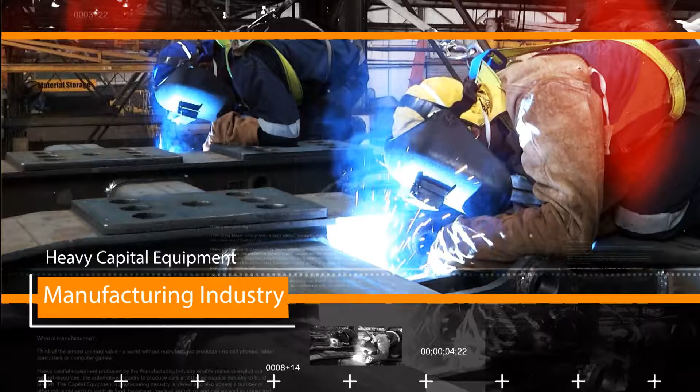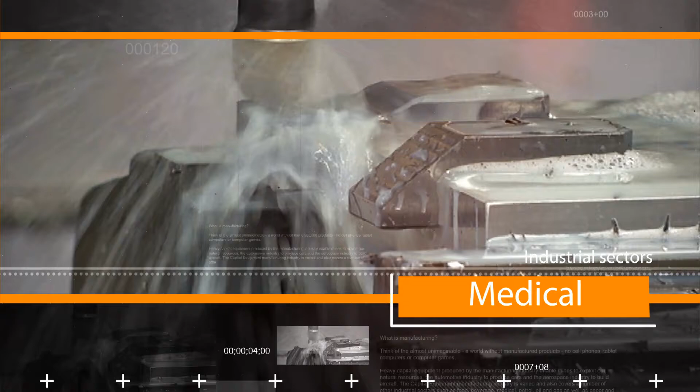What is manufacturing? Think of the almost unimaginable: a world without manufactured products. No cell phones, tablet computers, or computer games. Heavy capital equipment produced by the manufacturing industry enables mines to exploit our natural resources, the automotive industry to produce cars, and the aerospace industry to build aircraft. The capital equipment manufacturing industry is varied and also covers a number of other industrial sectors such as food, beverage, medical, petrol, oil and gas, as well as paper and pulp, just to mention a few.

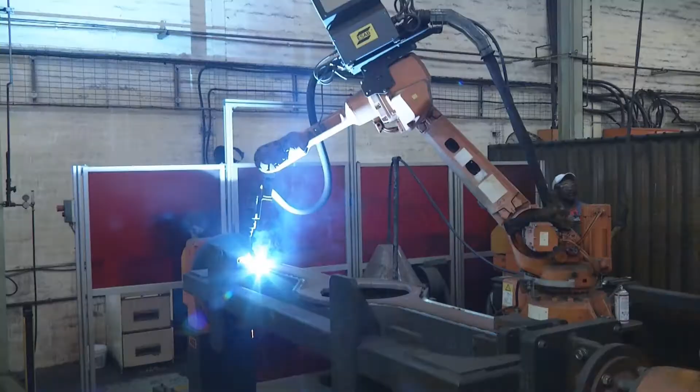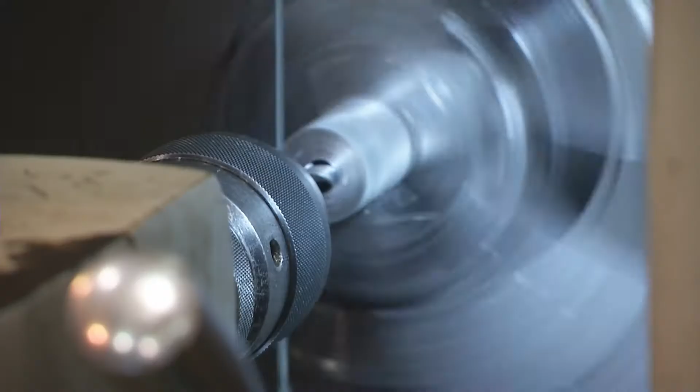The South African Capital Equipment Export Council, or SACEEC, is an institution that aims to grow the South African manufacturing industry and encourage exports, and promote and develop local manufacturing, which will in turn improve job creation and skills development. The Council promotes the manufacturing of capital equipment products in South Africa with locally produced castings, forgings and materials.

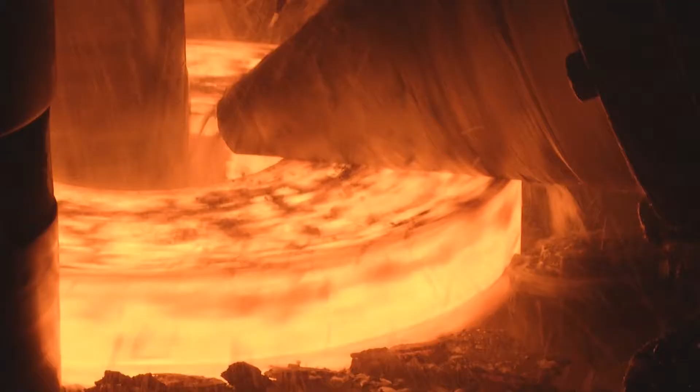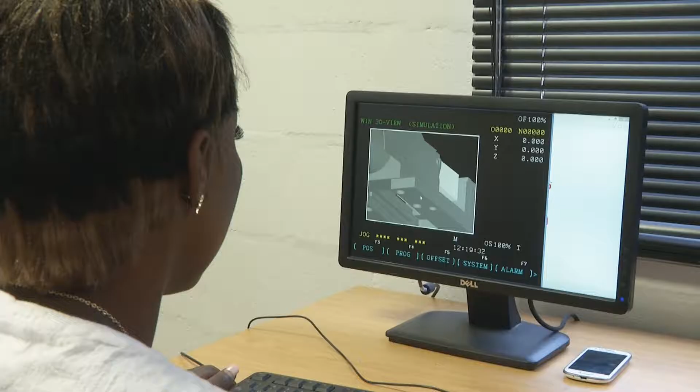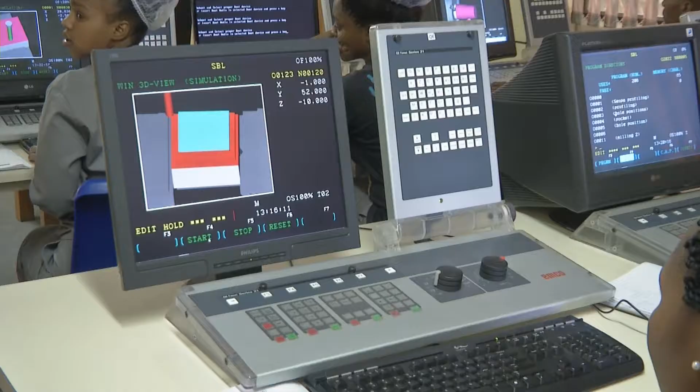The South African Capital Equipment Export Council now brings you the Discover Your Career in the Capital Equipment Manufacturing Industry initiative to highlight interesting careers in the versatile capital equipment manufacturing environment. So why is the Council talking to you? It has been tasked by the Gauteng government to identify the skills that are necessary to sustain and grow the capital equipment manufacturing industry in South Africa and to develop a model for the upgrading of skills development in the sector. Technically trained people in the manufacturing industry are called artisans.

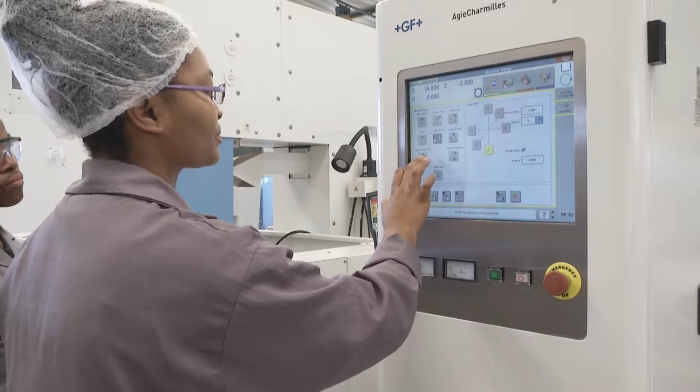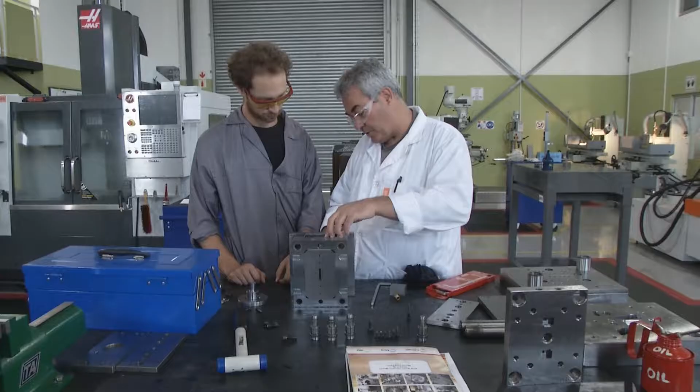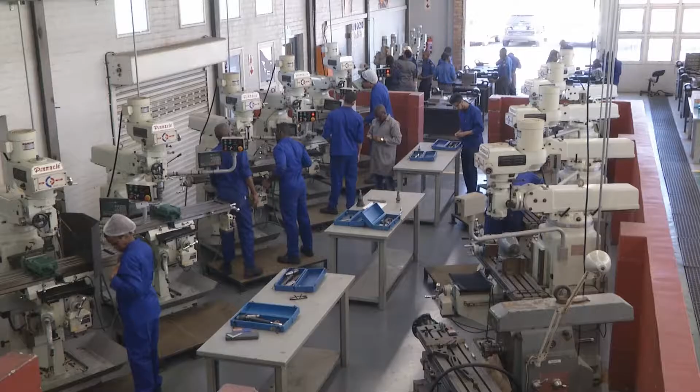They are trained and tested individuals who work with their hands. How do you become an artisan? To qualify as an artisan, a candidate needs to do an apprenticeship that includes theory, practical experience, and on-the-job training. In addition to training offered by community colleges and technical schools, apprentices also enroll at Technical Vocational Education and Training, or TVET, colleges. These colleges offer programs for specific trades or skill sets.

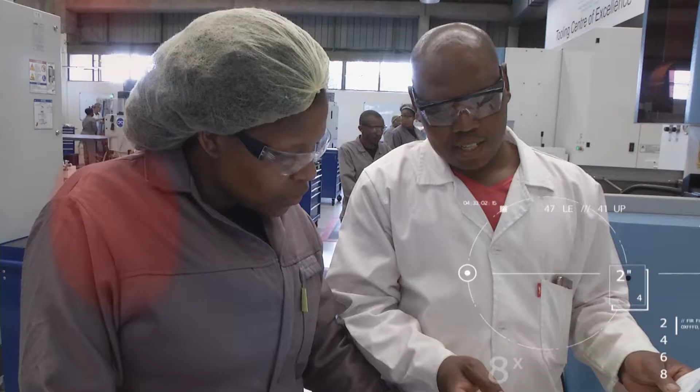Large companies and government offer apprenticeships. Apprentices earn a wage while they train. The time it takes to qualify can vary. To conclude their training, apprentices do a trade test to obtain a national qualifying certificate. To enter the SACEEC apprenticeship program, most member companies require candidates to have grade 12 level maths, English, engineering, graphics and design, and mechanical technology of at least 60%.

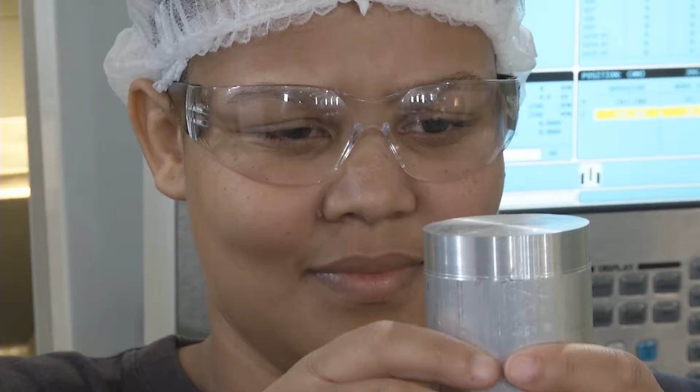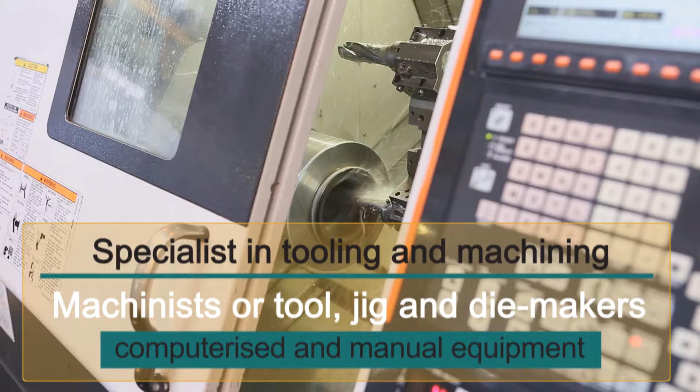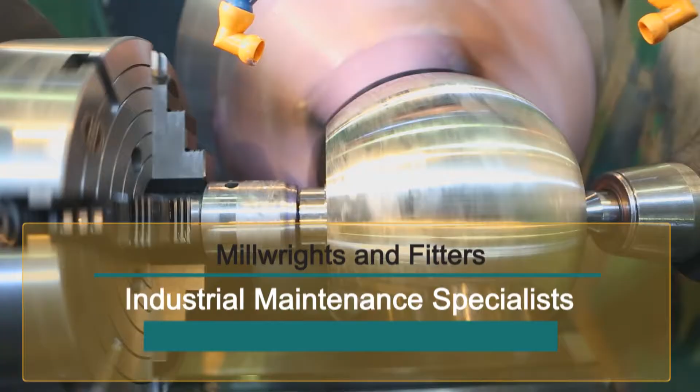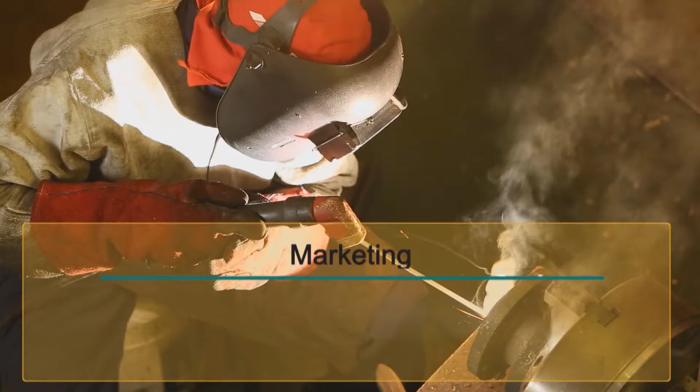Career opportunities are available to skilled people in the capital equipment manufacturing industry in a number of categories. Specialists in tooling and machining are called machinists or tool, jig and die makers, and they work with computerized and manual production equipment. A second category comprises millwrights and fitters who work as industrial maintenance specialists, while artisans in the boilermaker category work in the field of pressure vessel or general fabrication. Artisans in the coded welder category are trained in specialized welding techniques, while the technical sales staff category is responsible for marketing and technical client liaison.

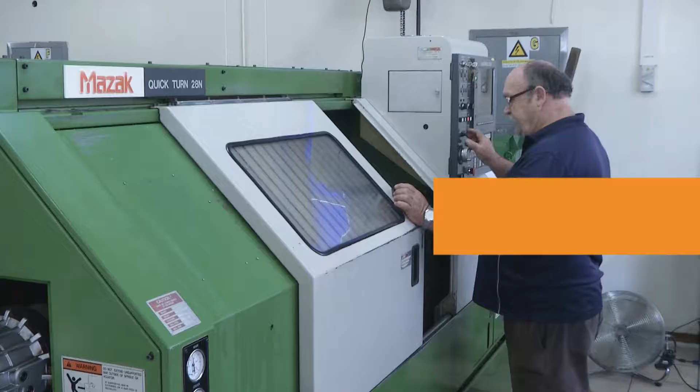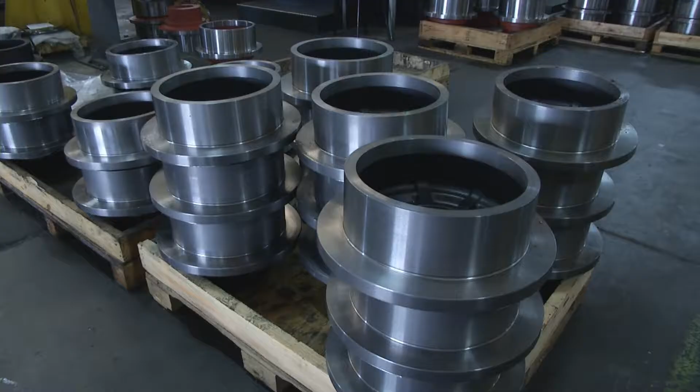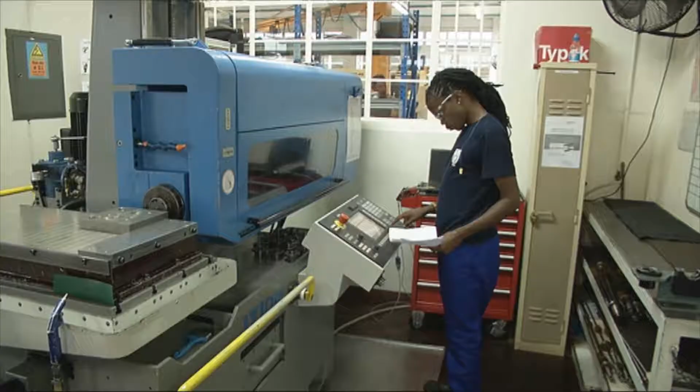Tooling and machining. What is a machinist? Machinists manufacture steel components used in the manufacturing of capital equipment such as heavy equipment for, amongst others, the mining and infrastructure development sectors. Machinists are also employed in the automotive, aerospace and marine industries, as well as a number of other sectors where machinery are manufactured. Machinists operate different types of computerized and manual production machines to manufacture components. They ensure that parts meet required specifications and measurements.

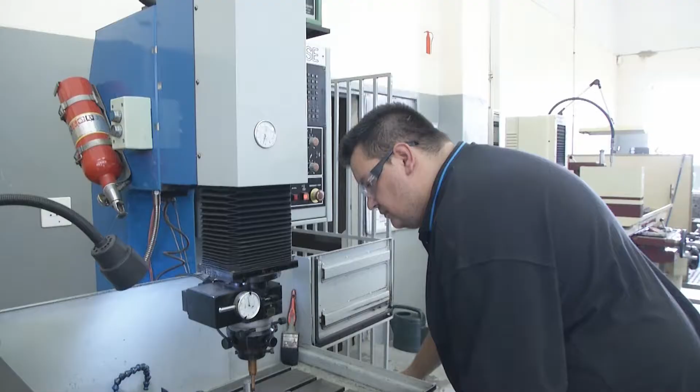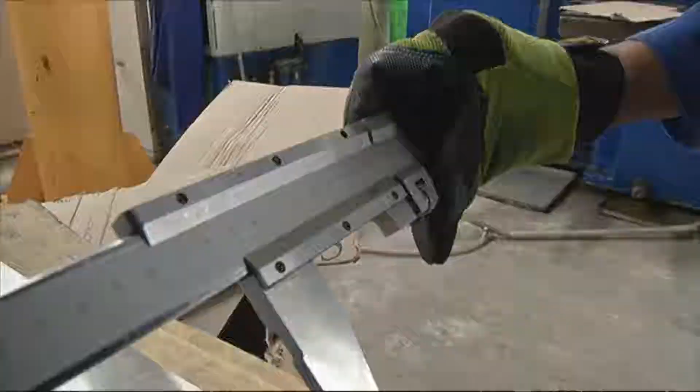If you want the type of job that requires working with your hands, programming computer numerically controlled or CNC equipment, or just the accurate measuring and physical skills for manual machining, then this could be a career for you. Is this career suited for you? Machinists are mathematically minded, good with their hands, detail-oriented, and hard-working.

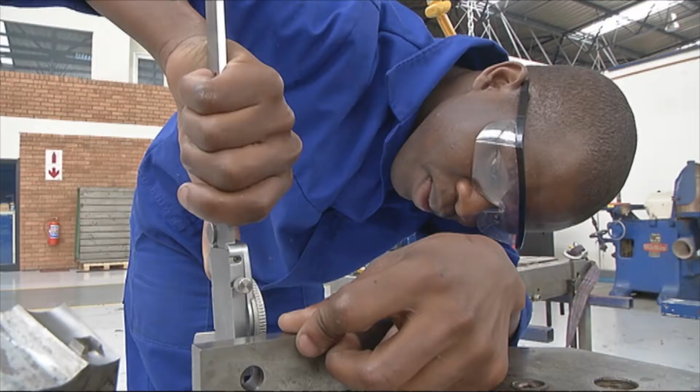Tool, jig, and die maker. What is a tool, jig, and die maker? The job of a tool, jig, and die maker is to create machine tools and dies used in the manufacturing process of virtually all manufacturing products, ranging from vehicle components to plastic bottles.

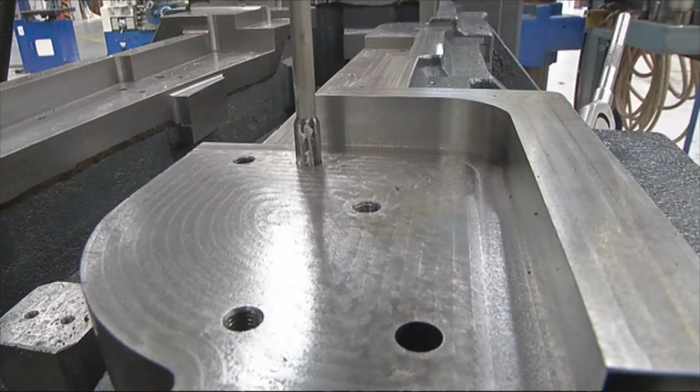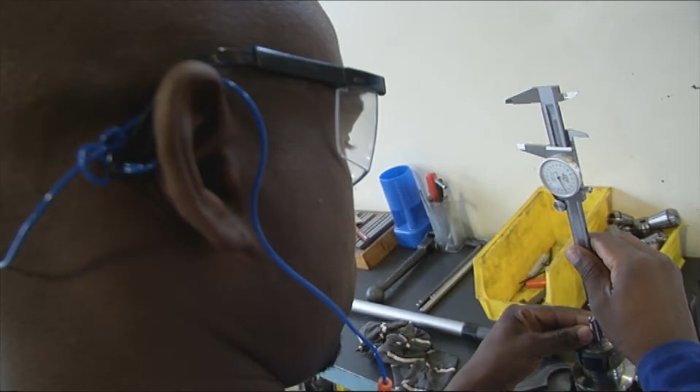They design machine tools and use blueprints to plan how to make machine tools, jigs, and dies. They use gauges and measuring devices to ensure that tools meet required specifications. If you consider yourself a creative and innovative person when working with your hands, then tool, jig, and die making may be the career path for you.

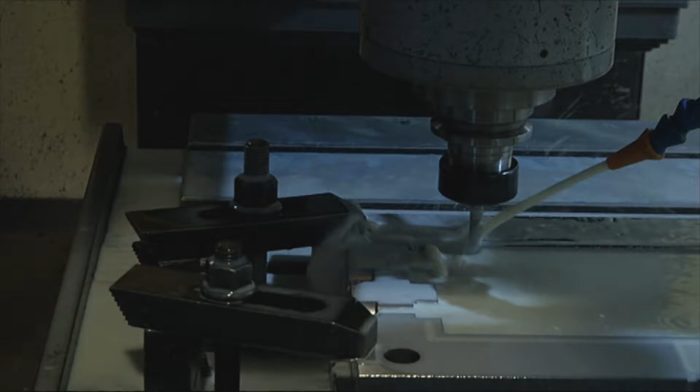Is this career suited for you? Tool, jig, and die makers need to be mathematically minded, detail-orientated, accurate, creative, and innovative with a good ability to do manual work.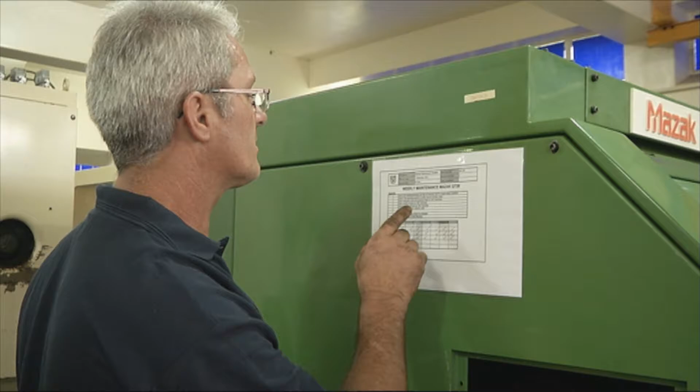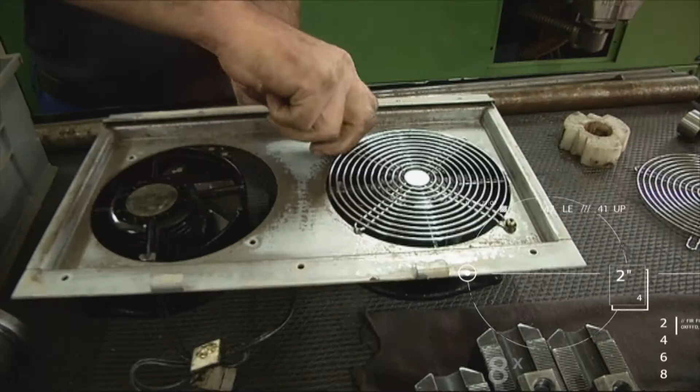Industrial maintenance. What is a millwright? Millwrights are known by a number of names such as electromechanician, ground electromechanician, machine tool millwright, or a printer's mechanic. Millwrights are craftsmen or specialized tradesmen. They install, maintain, and repair stationary industrial machinery and mechanical equipment.

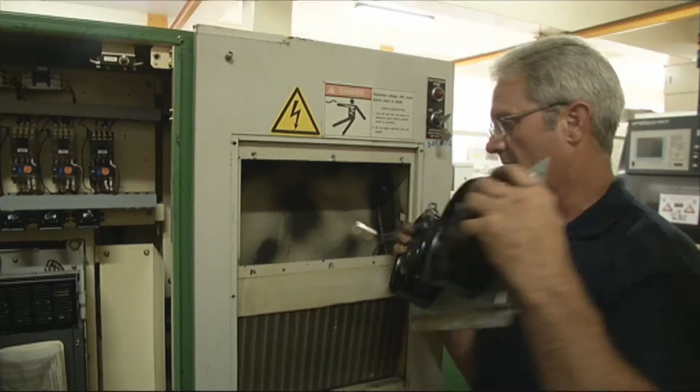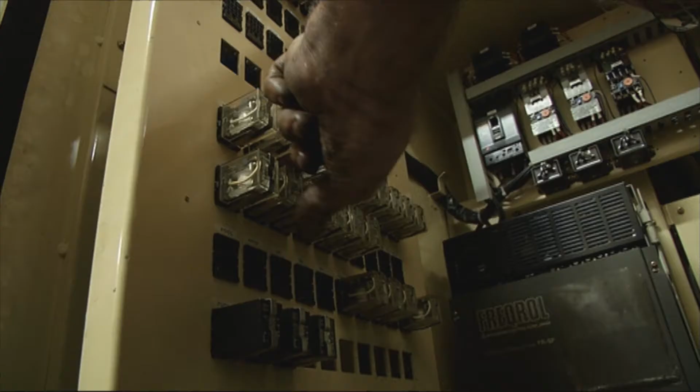Are you suited for this career? Millwrights are mechanically minded, self-confident, able to deal with pressure, accurate with good hand-eye coordination, and strategic.

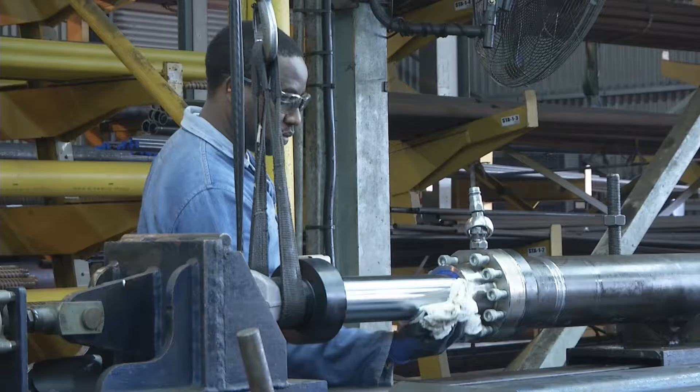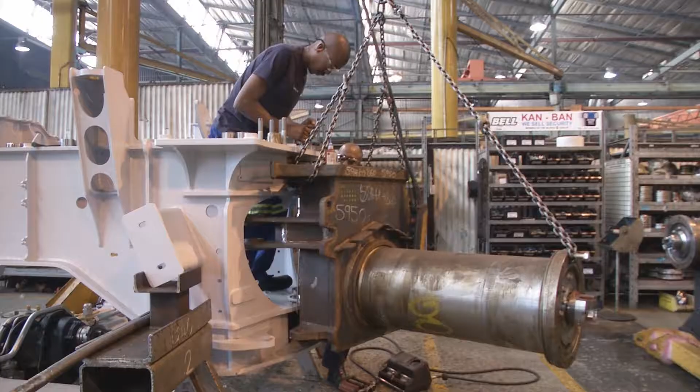Fitter. What is a fitter? Fitters maintain and repair many different kinds of machines. They are highly skilled craftspeople who assemble and fit machine components. They monitor the service cycles of machines and use blueprints to ensure that the correct parts are fitted.

Are you suited for this career? Fitters are mathematically and mechanically minded, good at working with their hands, able to take exact measurements and work accurately.

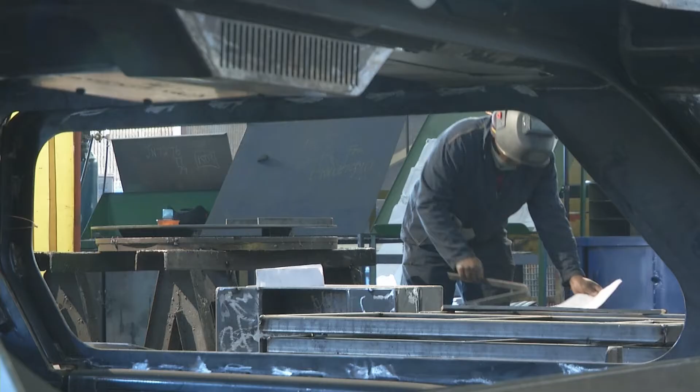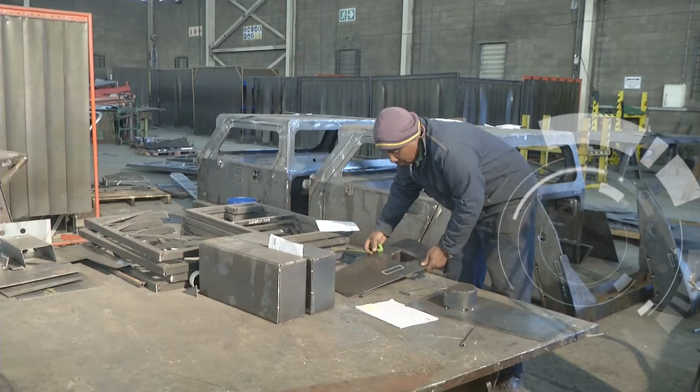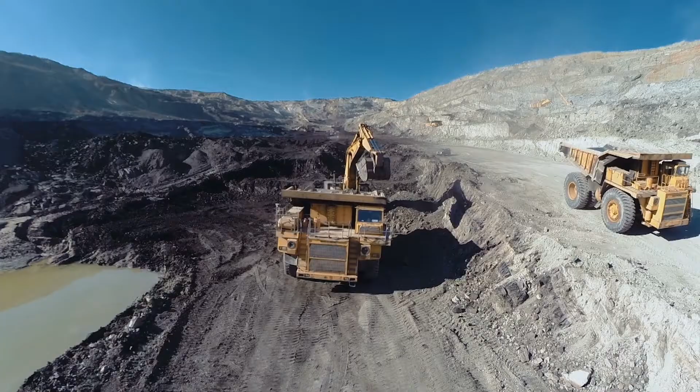Boilermaker. What is a boilermaker? Boilermakers are specialized fabricators. They work in the engineering manufacturing industry and make capital equipment, boilers, engines, and high-pressure vessels. They can be employed in factories, power stations, including nuclear power stations, on oil rigs, fuel refineries, chemical plants, mines, in the shipbuilding industry, and in engineering metal fabrication.

Boilermakers are highly skilled, accurate, and have an ability to understand geometry and technical drawings. Is this a career suited for you? Boilermakers are team workers, good with their hands, detail-orientated, organized, competent with technical drawings.

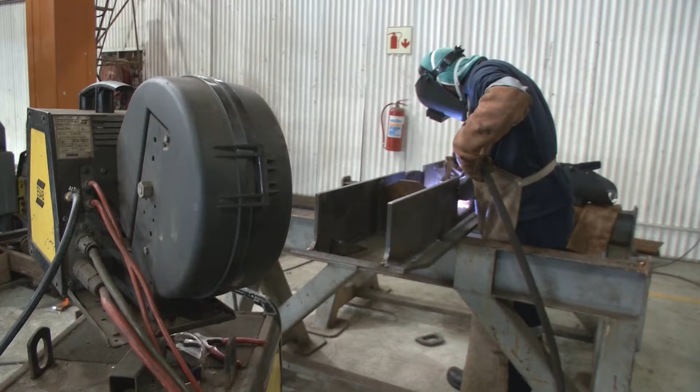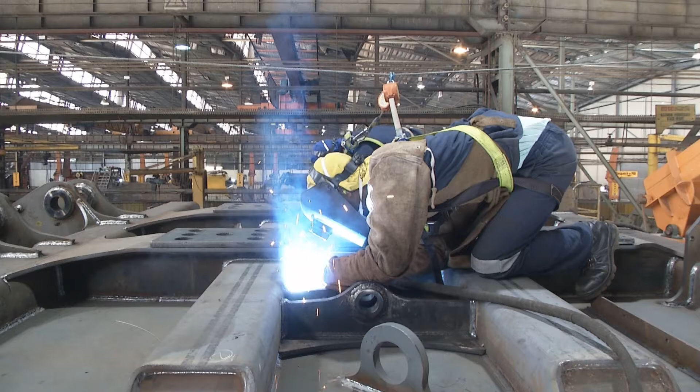Coded welder. What is a coded welder? Welders work with metal and know its strengths and weaknesses. Welding is the process of joining pieces of metal together. Heat is applied to metal pieces and this causes the metals to bond together. Welding is used in shipbuilding, automotive manufacturing and repair, aerospace applications, and thousands of other manufacturing activities.

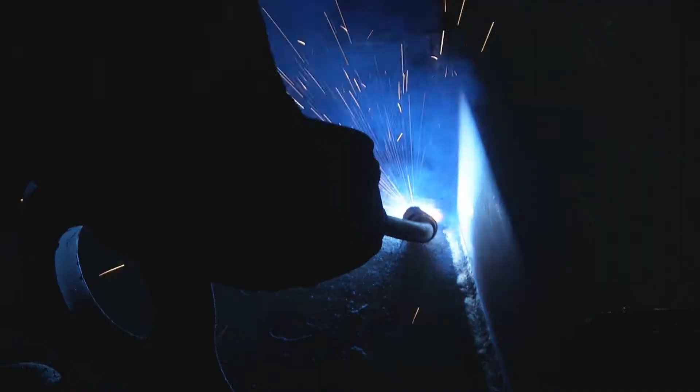If you like the idea of working with metal, then welding may be the career path for you. Is this career suited for you? Welders are physically strong with an ability to work in hot and difficult environments, accurate and focused.

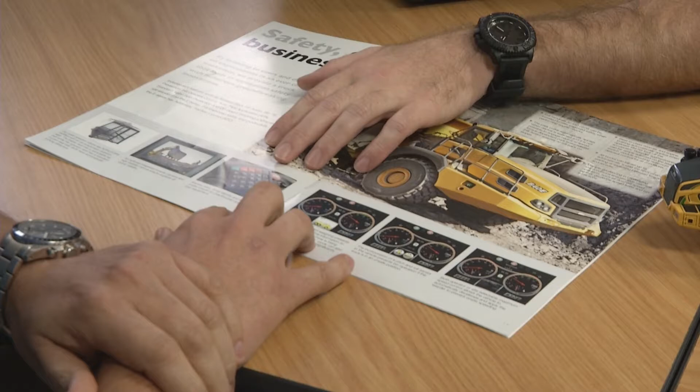Technical sales representative. What does a technical sales representative do? Technical sales representatives liaise with new and existing customers to discuss their needs and to explain how these needs could be met by specific products and services. They respond to customers' questions about products, prices, availability, product uses and credit terms, and liaise with production departments.

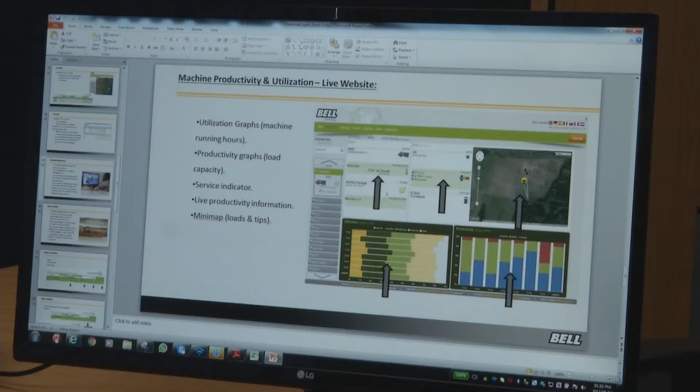They prepare quotations and assist with the preparation of tender documents. Technical sales representatives prepare sales contracts for orders obtained and submit orders for processing. They can also provide inputs for external marketing drives such as advertising campaigns, media liaison, and trade shows.

Is this a career suited for you? Technical sales representatives are people-orientated with good interpersonal communication skills. They are also technically minded with a thorough product knowledge. They are creative and good at project and financial management.

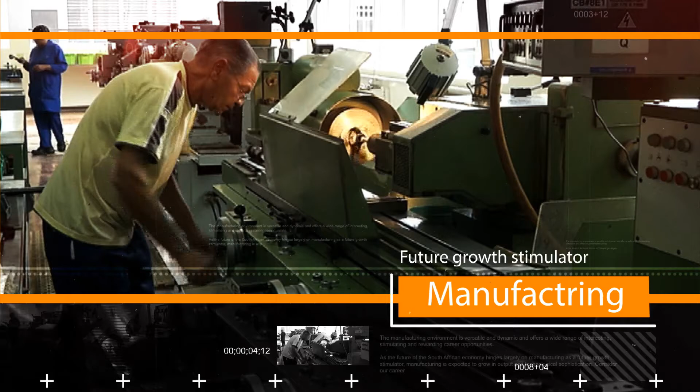The manufacturing environment is versatile and dynamic and offers a wide range of interesting, stimulating, and rewarding career opportunities. As the future of the South African economy hinges largely on manufacturing as a growth stimulator, manufacturing is expected to grow in output and technological sophistication. Consider your career option in manufacturing today.